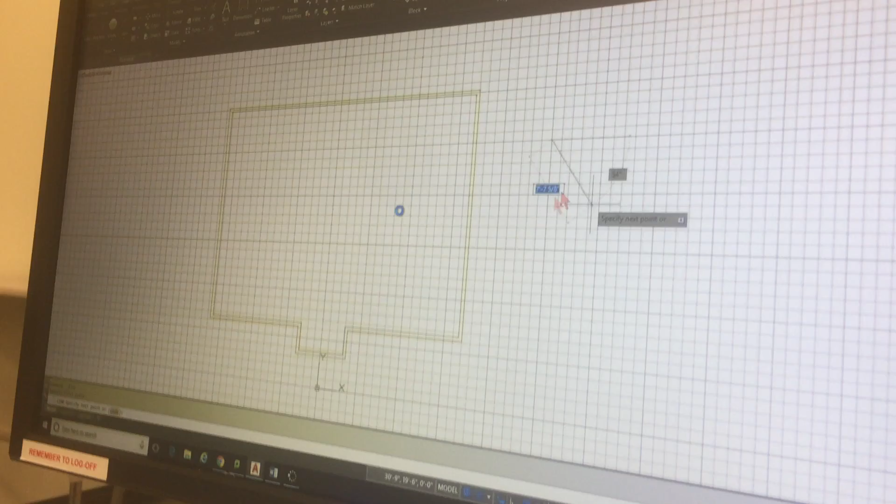So, okay, right now it's not doing it very well, but let me zoom way in. If I start my line command and point, notice what my cursor is doing right now. See what it's doing? It's hopping from point to point. Every intersection, it's finding it, and I cannot force the cursor to go in between any of those points. It's forced to go to the point.

I'm just turning off my alarm here so it's not distracting. I have to take my meds at 8 o'clock. Addiction's a terrible thing. I'm kidding.

It's a great line. Okay, so I go like this, and you're hopping from point to point, and you'll notice that it's doing this right now. Now, what if I want to pick a point that's not there? What if I want to pick a point that's not an intersection? What do I do then?

Well, I'm kind of screwed because I'm using this snap and grid. So what I would do is, first of all, if I turn off snap, well, snap loosens that up. Snap will turn that off, okay? If I leave that on, though, I'm jumping from grid to grid.

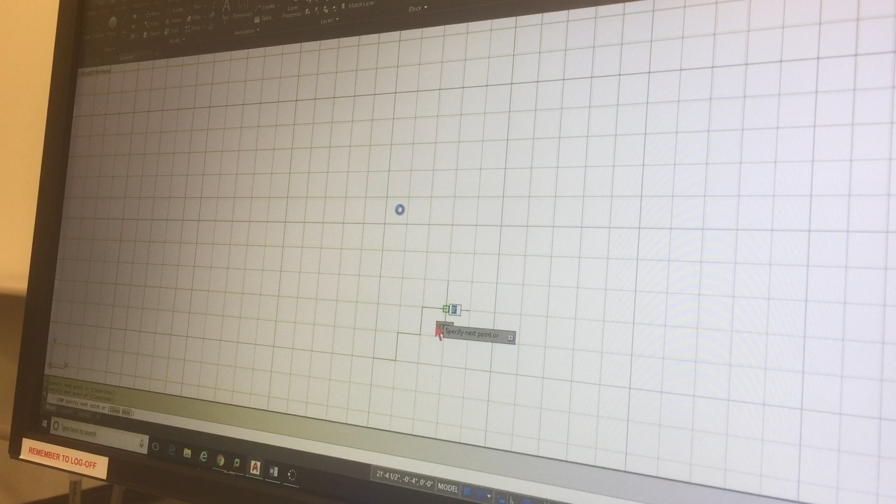So let's say I pick on this point right here. Well, it's great if I'm doing stair steps, or a ziggurat, or a lot of different shapes like that, like the Guardian building in Detroit. But if I'm not doing something that requires this, and I need to go off the grid literally, then at that point I am really not going to be too happy with using snap and grid all the time.

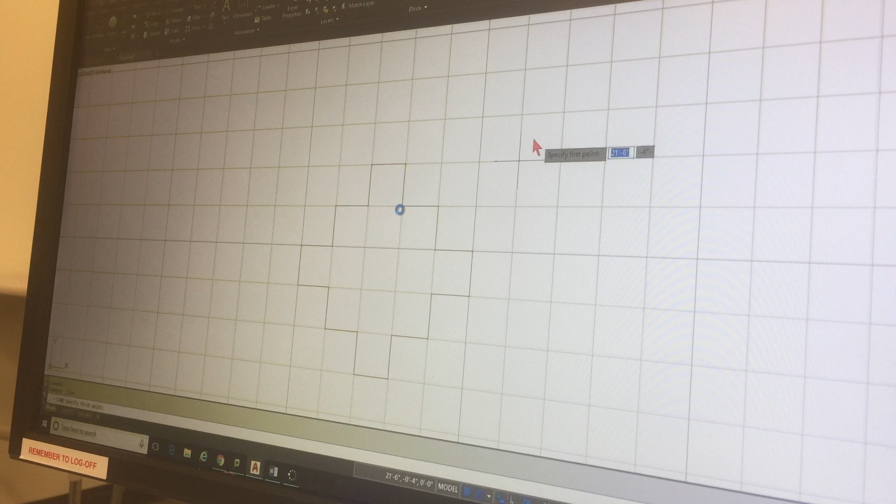So what some of you are finding out is you're trying to put in a value, and you're trying to place it someplace and it keeps on snapping. But if you turn off the snap, now you know where you want it. That's how snap and grid work.

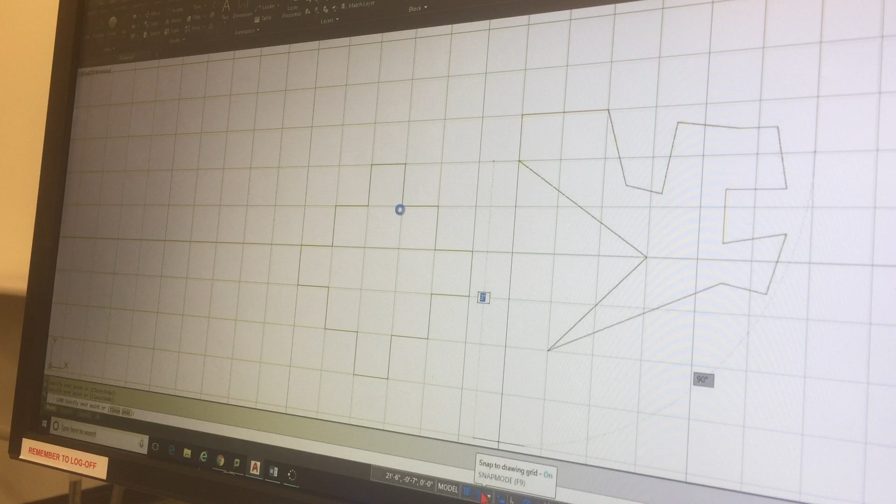Again, this is not object snap, this is just normal snap. Snap is recognizing a grid environment. If this is turned on and your cursor is doing this, your snap's on, and you need to turn it off because that's just getting in your way. This is snap, right down here, snap mode. So you turn that off and turn that off.

Just so you guys understand what's going on there, so that's snap and grid. I leave them off for what we're doing here. It's actually kind of helpful when you first start to learn AutoCAD, but we've already kind of jumped in without it, so let's just leave it alone. Make sure those two are turned off.

Now, to draw another line, I'm going to start with my line command here, and I'm going to go right here. I'll just use a polyline. Now, I want to draw my first line from the upper left corner going to the right, where it says 7 foot 4 inches. Do we see that? All right, so when I touch it here, and I want to go over 7 foot 4 inches...

I just drag my cursor, and I'm getting a tracking vector. Do we see that tracking vector? And I type in 7 foot 4, boom, and there's that point.

And then how far do I take it out? Well, let's see here. It's 9 feet 7 on the interior there, plus I have to add 5. So 9 foot 7 plus 5 would be what? 9 foot 7 inches, and we add 5 inches, what do we have? 10 feet.

So we go 10 feet, and 10 feet will bring us out to here. Now at this point, I've got that first line, and then I can just start to follow it over.

Now it tells me right here, looks like I'm missing a dimension there. Where is that dimension? Looks like that's kind of going away. Well, that's okay, we can just go. We can do it. Yeah, that dimension's missing. We can definitely piece this together.

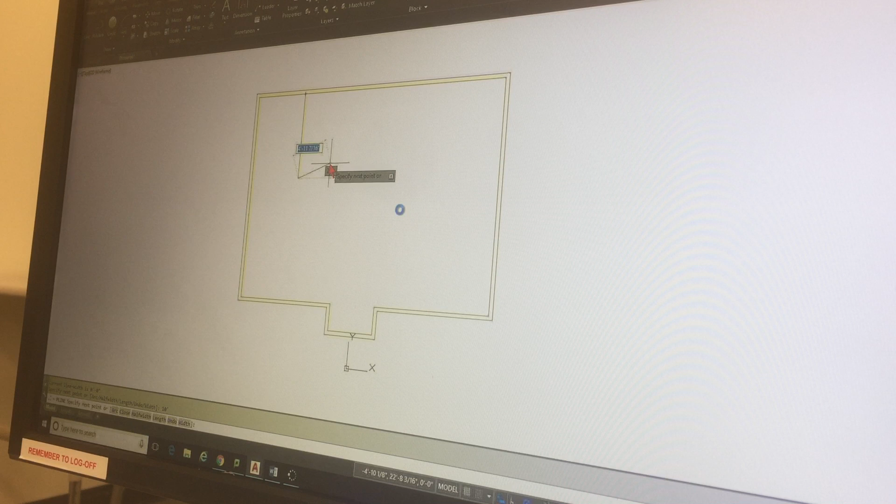But for right now, let's go, we'll go over. Yeah, that's blank, it should be blank. Okay, for that point right there, let me get you that dimension because you're going to need it.

All right, go to this. All right, this. All right, what I'm going to do is I'm going to open up that drawing and let's see this in.

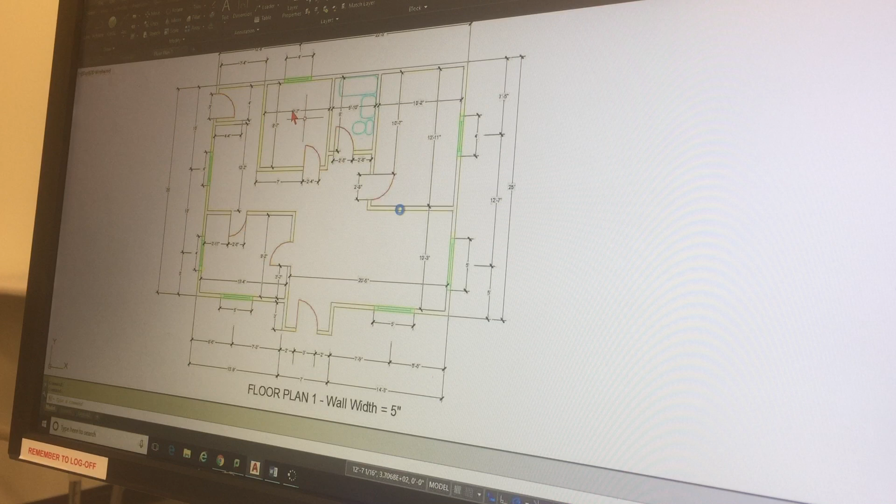Okay, the distance is actually 9 foot 7 this direction too. So write that down, get a piece of paper and write that down. That dimension is 9 foot 7 on the interior of your drawing. So glad you found that. It's 9 foot 7 from here to here. You're going to need that. So that's the dimension I just want to give you.

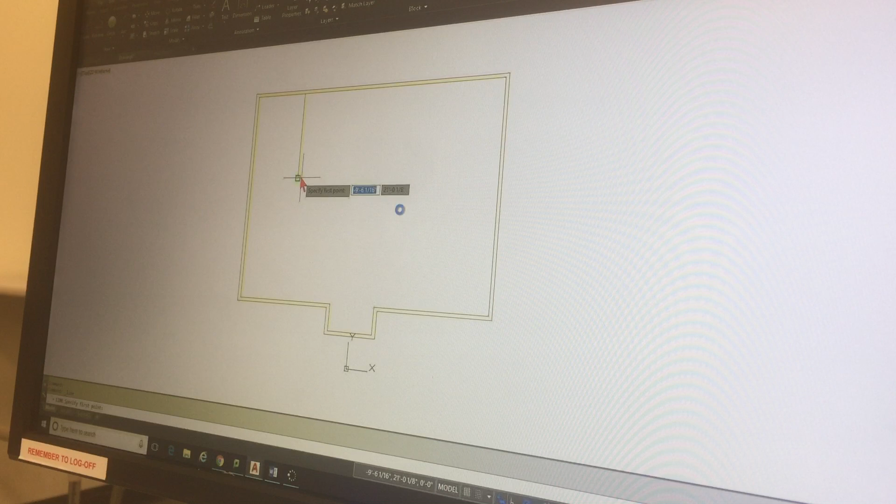So if I go back to here and continue to draw, I'm going to go over not 9 foot 7 because I actually have to add on 5 inches. So again, 9 foot 7 plus 5 inches is what? 10 feet. So 10 feet here. Boom, so that brings me down to this point.

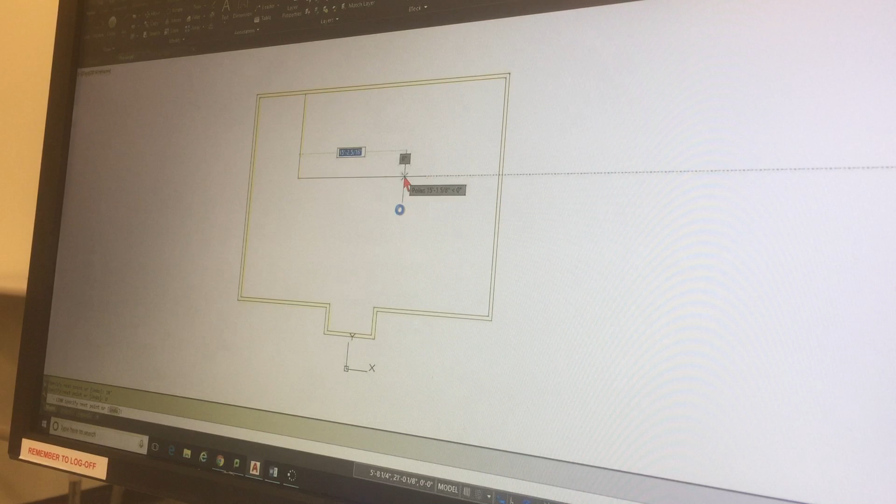Question? Yes. Oh, you're doing the outside. Oh, you're right, you're right, you got me. And so it's 10'5". You're right, because you're talking 9'7", plus 5 is 10, plus 5 is another 5. So it's 10'5" exterior. Okay, so 10'5", very good.

And then if I want to, I can just bring my cursor down here and close off that wall, just because I don't know what my next dimension is. So we'll just go ahead and do that.

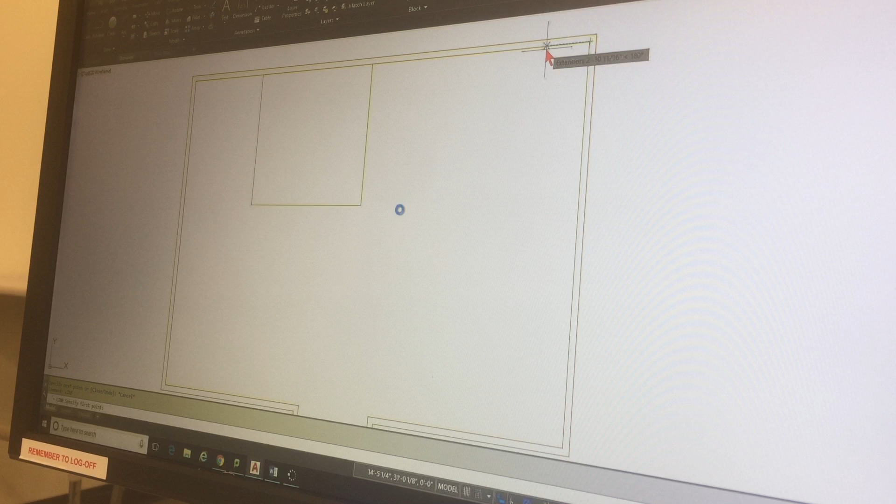Now moving on from there, if I want to start from here, I put my cursor here and drag it over to the left. And how far would I go over to the left to get this inside wall? I'm going from the upper right over. You see where it says 10'2"? You guys see it at the upper right there? Okay, that's 10'2". So I'm going to go 10 feet 2, okay?

And then I go ahead and come down this, and the distance here is going to be 13 feet 11, coming off the drawing here, and I go like that. Now that gives me the basic geometry, and then I can just offset those two walls, because I know they're 5. So I can go ahead and offset this distance, and since I didn't make it a polyline, I have to do it that way, but that's okay. So that gives me my basic construction.

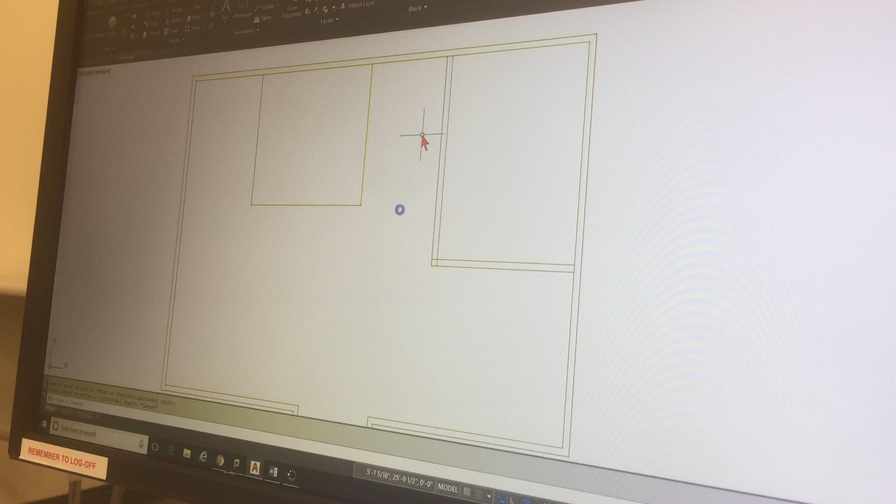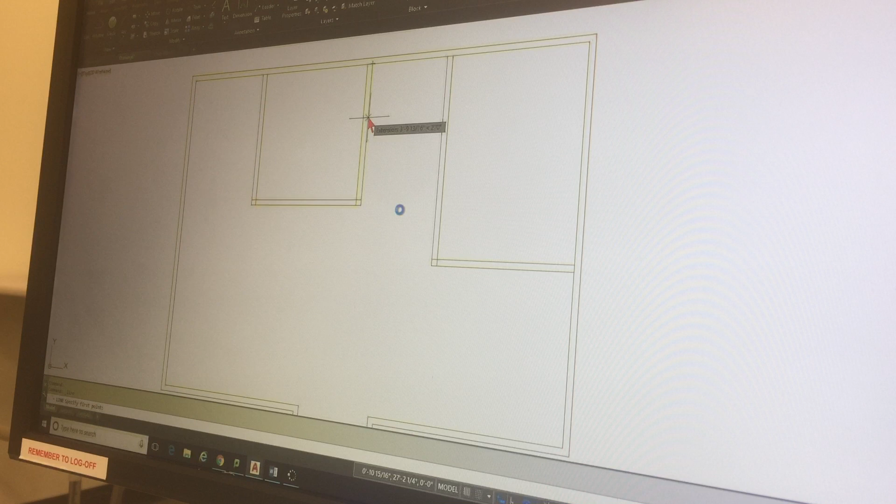Now my next wall, I know that I got to offset this one now, 5 inches, and I got to go over this way because I did the exterior, and so I've got to go ahead and go in here to get this. Okay, and you just got to pay attention to where the lines are coming from, where they're originating, and so forth. And now this is going to be 8 feet coming from here. Again, I'm just kind of going through it. And you guys can draw this in a different kind of way if you want to.

But this is just how I have found it to be easy to do. Okay, and then at this point, if I've done it correctly, I'm going to start my trim command, and I'm going to do the nuclear option, and enter, and then I can go ahead and just start to get rid of some of these to kind of clean it up. All right, and keep going like this and like that. Okay, kind of clean up that a little bit, clean up some of these areas, because your walls should always go right through.

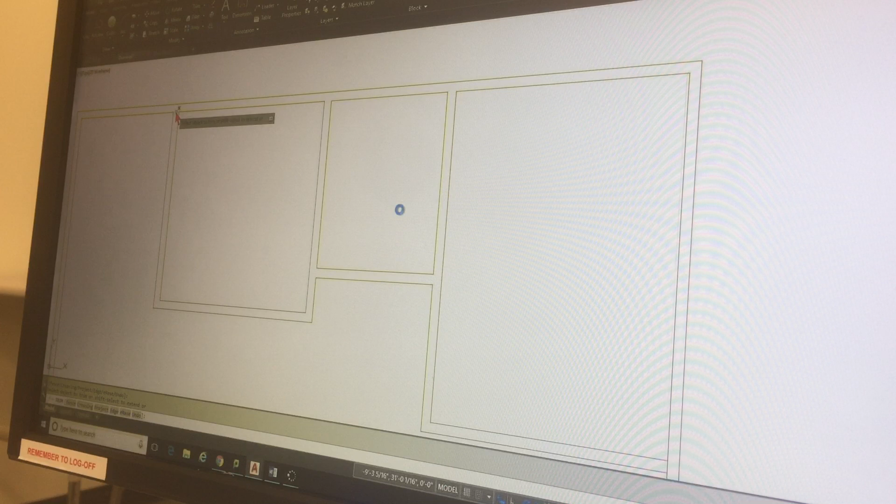So there's your basic outline right there. Now let's verify that it's correct. So I'm going to go to here and go to dimensions, and let's measure a couple of these and make sure that they're right. So we're linear, and let's go from here to here, and that's 9'9", so that is not right. So we have to fix that.

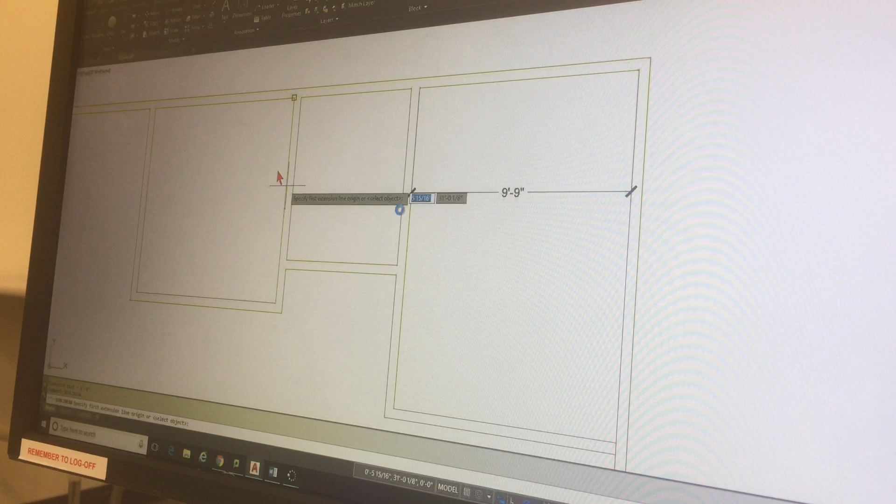And let's look at this next one. This one's supposed to be 9'7". Let's see if that's right. That's right. And then this one should be 5'10", and that's 6'3". So I missed something here.

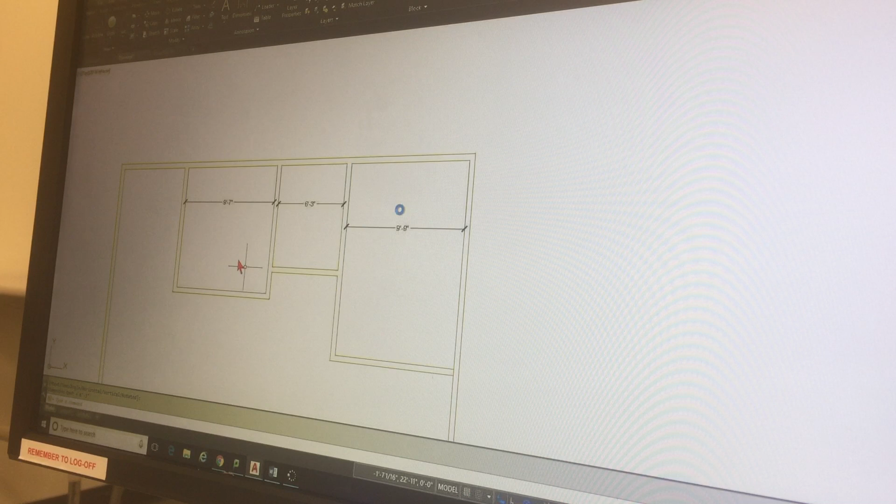I missed this wall right here. So this wall right now actually needs to go over from 5'10", needs to go over 3 inches. Let's see, how does that work? Oh, it's off by 5 inches. Yeah, we're off by 5 inches. So let's see, so it's like 9'9". Let's see here, yeah, this place, let's check this out. Let's try to decode this.

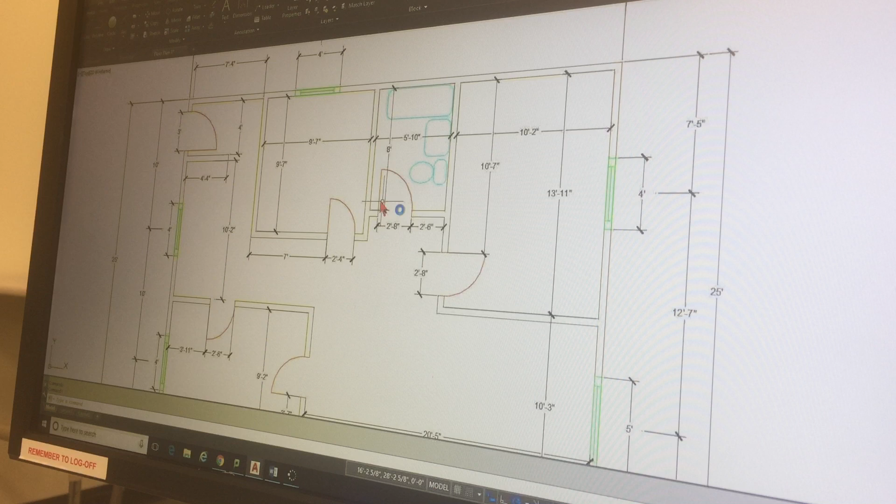And that's not, let me check this out again. 7, 5'10", 10'2". Okay, make sure I got this. All right, so that's one of them. Now we do this one. Okay, 9'7".

Make sure I got this right. You offset on the wrong side, on the right side of the bathroom. What was that on? You did the offset on the wrong side of the line on the right side of that middle bathroom. Oh, this right here? Oh okay, gotcha. Yep, you're right.

So if we go like this, if I offset this way, I can do this way too. We go over 5. Okay, there we go. And then we go over this way, and we go over 5. So when you build these things right here, it's just something you gotta pay close attention to, as you see. It's something you gotta work with. There we go. And then you just kind of work this through and get the idea.

And then I can use a cool command called fillet, which should work nicely here. All right, and then we do this and grab this and do that. Okay, so we can begin to do that kind of thing.

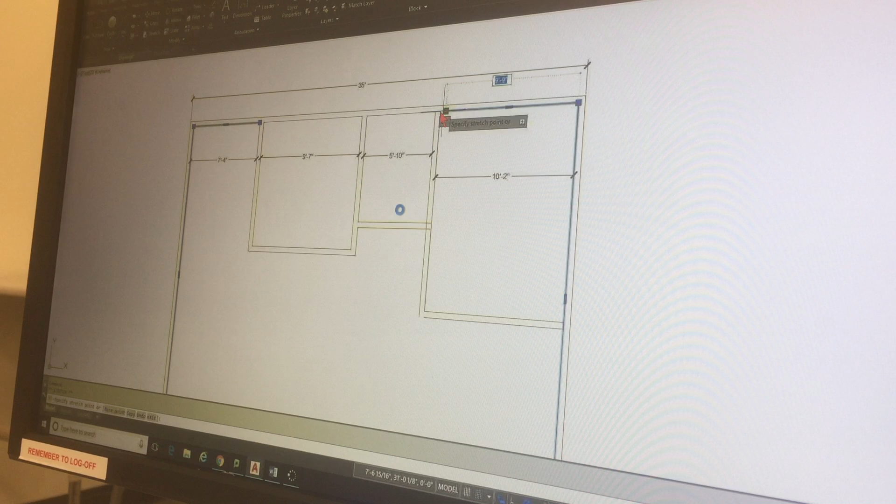So we got our dimensions like this. And as you're working through it, you just want to make sure that you're connecting your different things and measuring as you go along. Just because if you're not where you need to be, it's going to be a pain to go back. So let me go back and measure the rest of this out, make sure I'm good to go. And this is just good CAD practice. As you go through here, make sure this is all right.

And that's 7'7". And that is not right, so that's got to go, offset that one incorrectly too. Which commonly happens when you're kind of doing offset, sometimes you'll assume one thing.

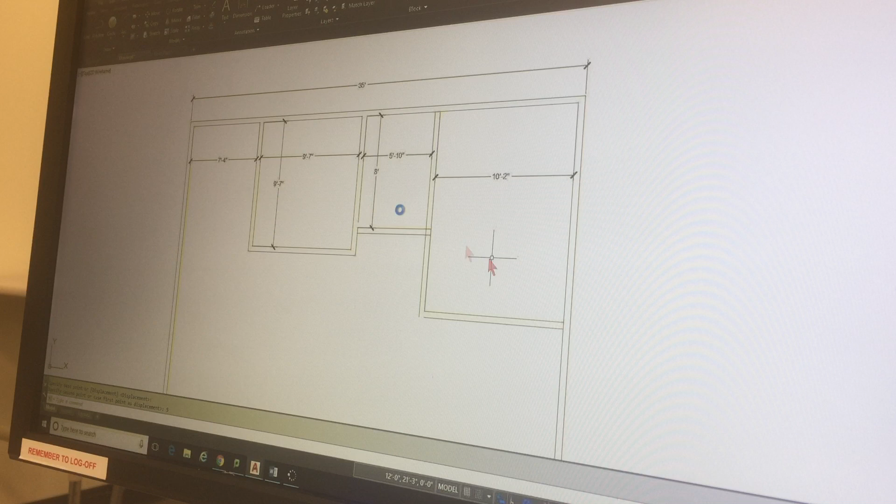By the way, that's a really cool thing. The move command is a command that we haven't really done much with. Let me show you how move works. All these edit commands work the same. Move, copy, rotate, mirror, scale, they all work the same way.

If I start my move command, and if I highlight those two, I want to move those, and I right click. Now what I want to do, it's asking me for a base point. I'm just going to go ahead and pick a point on it right here. And then how far down do I want to move it? If it's originally 7'7", it's gotta be 8 feet. Five. I got on 5, so I messed up by 5. And when I do that, my dimension automatically updates, because it's attached to it.

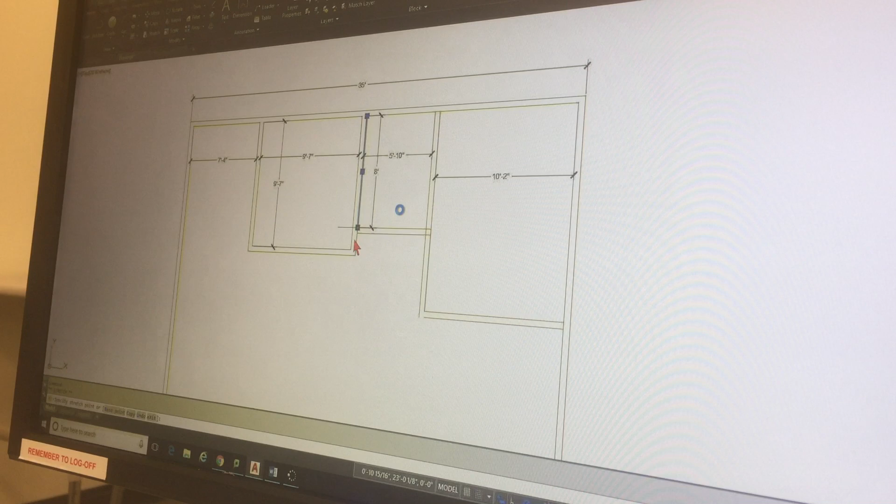Very cool. And so anyway, a couple different things there. Okay, so now my geometry is looking pretty good. I'm gonna go nuclear again with my trim, just to clear out some of this stuff. And then I can use my fillet command to heal this one.

Okay, now once I've got that together, let's just check this last dimension, make sure that we're good to go here. The fillet command was F? Fillet command is F, yeah. So you type in F with no radius attached, it's gonna go ahead and attach walls together like that. There's a couple different ways you can do it too, but for right now, that's what it is.

Now, did I do the same in this wall here, didn't I? I'm sorry, what's that? Is it F enter? It's F enter, fillet, yeah. Now, by the way, it's not spelled fillet, it's actually fillet. We had a big discussion about that when I was a young CAD guy. It's fillet, and it's actually fillet.

Okay, now here, this is 13'6". Is that a correct dimension? No. What did I do wrong? I did the offset the wrong way.

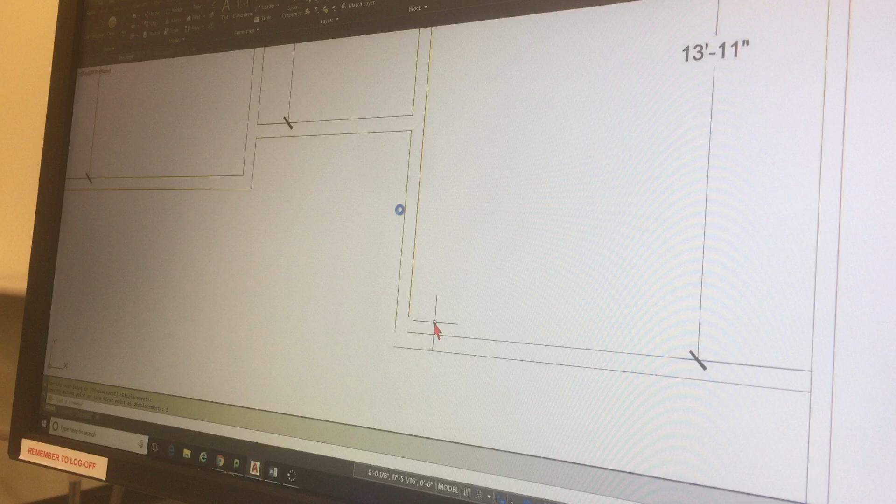So what do I do? I can go ahead and grab it, and with my move command, I grab these two walls, right click, choose a base point, drag it in the direction I want, and how far does that have to go? That's right.

All right, and then this right here, like I said, I use my fillet command, or if I just click on this right here, I can click and drag a grip. When it turns red, I can click and drag it like that. This is simple grip editing, like that. That's another way to do it, might be a little quicker for you. And then down here, how would I get rid of this little piece of trim? Using the nuclear option, okay?